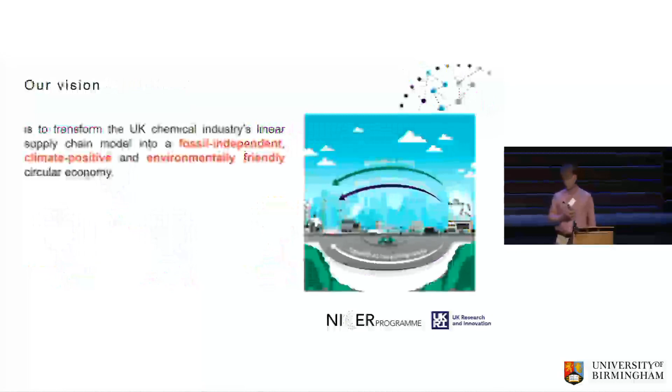So the vision of our centre is to then transform the chemical industry from its linear model towards a more circular model. The chemical industry is a very complex sector. There's thousands of different chemicals. So when we set up the centre, we decided to narrow it down to organic chemicals, so carbon-based chemicals, and specifically within that olefin-based chemicals, which account for about 70% of all organic chemical production.

The centre is led by Jin Xuan, who started in Loughborough but has recently moved to Surrey University. And we've got 7 other partner institutions: Loughborough, Cardiff, Liverpool, Hertford, Sheffield, Newcastle, and Imperial College. And we started with around 23 partners, but now we're working or engaging with over 100 different organizations.

So let's start to look at a bit of background about chemical resource flows. So generally we take our fossil material input. We can then refine this input into platform chemicals. Those platform chemicals are further converted into our desired chemical products. They are converted, then sent to the consumer, they're used. And at the end of the use, we might produce solid wastes, which if we're lucky, we can separate them, source segregate them, collect them, and recycle them.

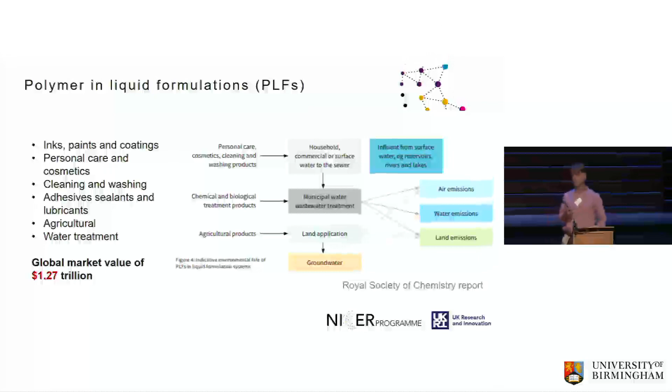But unlike the solids, it's quite difficult to collect these materials. So they might go into your drain, into your ecosystems, or they're directly released as CO2. So it is obvious that we need to find a different way of meeting those carbon shortfalls for those chemicals that we can't collect. So where are we going to get the carbon from to meet that gap?

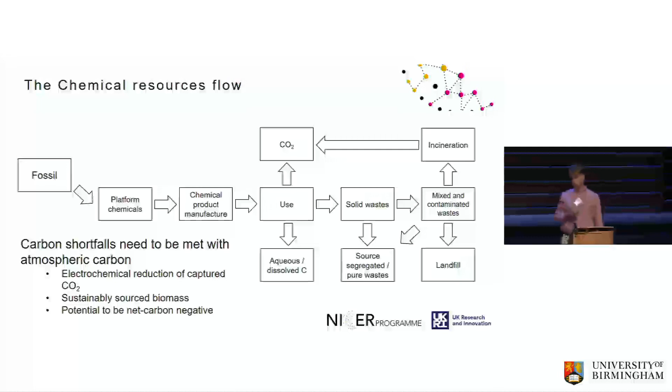Two of the solutions could be that we use the CO2 that's released in the environment, we electrochemically reduce it back into chemicals, or we could use biomass, which uses the CO2 for growth, and convert it into chemicals. And one of the big advantages of that is that it also gives us a potential to make the chemical industry carbon negative. So if we capture that CO2 and convert it into material, we store that carbon, and we move from a fossil-based system to a carbon negative system.

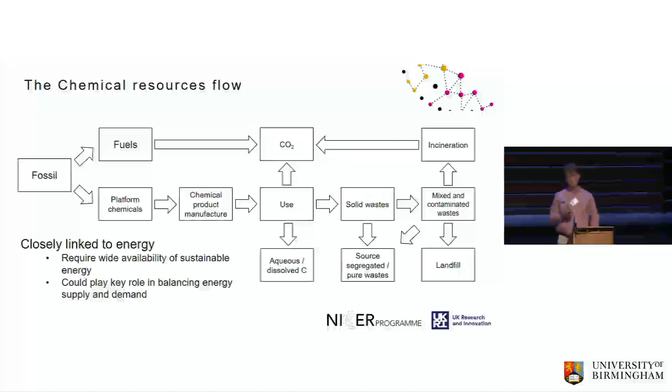And the final consideration is that the chemical industry is actually very closely linked to the energy system as well. So when we take the fossil fuels out of the ground, we don't distinguish whether this is a chemical feedstock or a fuel. In fact, we measure all this material in terms of energy units, and only when it comes out of a refinery, we start to say, okay, this is the quantity of chemicals that it's got. And a lot of the processes that we use in here are also very energy intensive. So we need to think about where we get the energy from.

So just to summarize then what we are trying to do, we've got our linear economy starting from oil and gas. We produce our petrochemicals, intermediates, we produce polymers, but also other chemicals into our finished products. And then it moves into the use phase, where at the end of that we produce waste, and this waste is currently collected, sorted, and then disposed. So we have already done quite a good job in the UK focusing on mechanical recycling. UK plastic recycling stands at around 45%. But as I explained, that is only a small fraction of all the chemicals that are used.

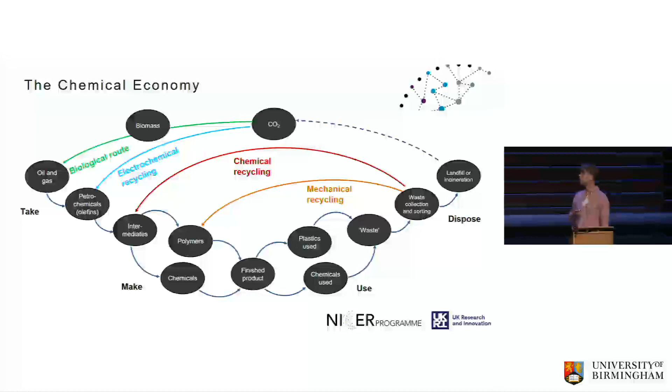So the next thing we can look at is use that material and then break it down into its chemical building blocks through chemical recycling. But even so, we will still have a lot of emissions in the form of CO2, and then we can start to look at electrochemical reduction, electrochemical recycling, using this excess renewable energy. Or finally, that CO2 is released, it is captured in the form of biomass, and then we can use this biomass and convert it back into fresh chemical feedstock. And this is really what our center was based on.

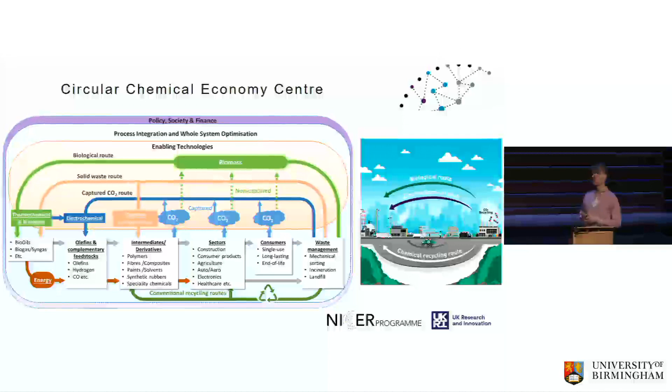So this is the same kind of diagram with a little bit more detail. And I'm going to now explain more about the center structure and what we're trying to achieve in the different work packages. So our center consists of three integrated themes. The first theme is focusing on underlying technologies that we need to achieve this transition. So how do we take the waste and convert it back into new feedstock? How do we use the CO2 that's released and reduce it into chemicals? Or how do we use biomass to meet our technology gap? So this is really focused on lab-based research to develop new technology options to supplement the technologies that already exist.

Theme 2 then looks at the application of these technologies. How can they be used as part of a wider system? So, for example, we might be wanting to produce a certain product, and then we can see how we produce it currently, what are the new ways of producing that, and then we can compare the economics, but also the environmental impact, and find the social impacts of different system routes.

The final theme is looking at anything that is non-technical, so all the kind of barriers and opportunities associated with the circular transition of the chemical industry. This ranges from the finance, how do we pay for this, or who should be paying for that? How do we work with society, and what do they want from a transition?

Engagement with industry, of course, is very important, the ones that are going to enable this. And finally, working with the policymakers to understand how do we create the favorable frameworks that encourage further innovation. And then all these different areas of the center are linked together through case studies and cross-theme integrations. And I will present some examples of them as part of theme 3.

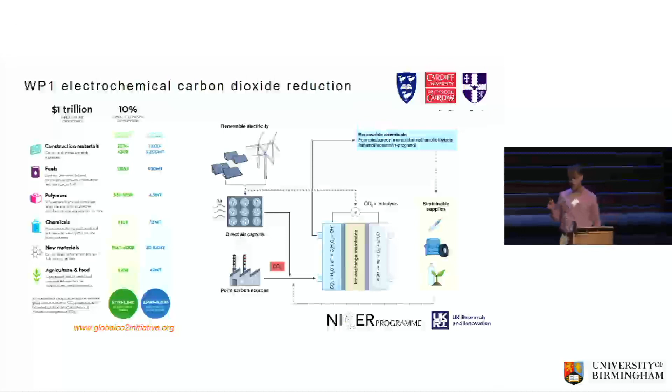To do that, we can either use direct air capture, where we remove CO2 from air, or we can use a point carbon source, and then we combine it with renewable electricity in an electrochemical cell to reduce the CO2 at the cathode and produce oxygen at the anode.

In the center, we took 2 different approaches. The first one is we can reduce the carbon dioxide into carbon monoxide and hydrogen for use as syngas. And there are already many different chemical routes available to then convert this syngas into different chemicals. And the nice thing about this approach is it's relatively straightforward. We can see we only transfer 2 electrons on the reduction side and 4 on the oxidation side.

So it's a reasonably well-developed technology. But of course, what we would really want to do is produce olefins directly, where we reduce CO2 into higher hydrocarbons like ethylene, propylene, etc. But then we can see that the chemistry here is a lot more complicated, so we need to transfer a minimum of 12 electrons. So we need much more advanced catalysts which enable us to do that.

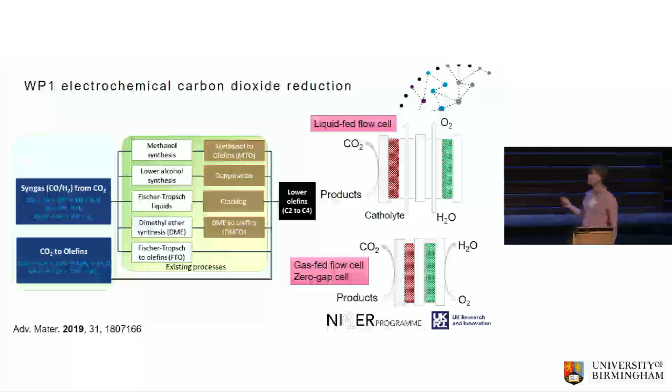The other difficulty with reducing CO2 is that we now need to develop a three-phase system. So we've got our solid electrodes, our liquid electrolyte in the center, and our gaseous carbon dioxide feed. So we need to overcome those mass transfer limitations. How do we transport the CO2 to the electrode surface? Conventionally, you would take your flow cell, with your electrolyte in the middle, and you bubble the CO2 through the electrolyte to come to the electrodes.

But our team in Loughborough developed a new system where the CO2 is brought into the cell from the outside. We've got a permeable membrane, so it basically comes from the back to the electrode surface where it can then be reduced.

So I'm not going to go into the detail, but really, how do we develop this technology? We need to think about developing new catalysts. For example, when we want to convert CO2 to syngas, we want to have high selectivity to carbon monoxide. We've got different electrode materials like copper oxide and tin oxide, and we can see that they provide us with differences in our product distributions. But now we can try and bring them together to tune our product selectivities.

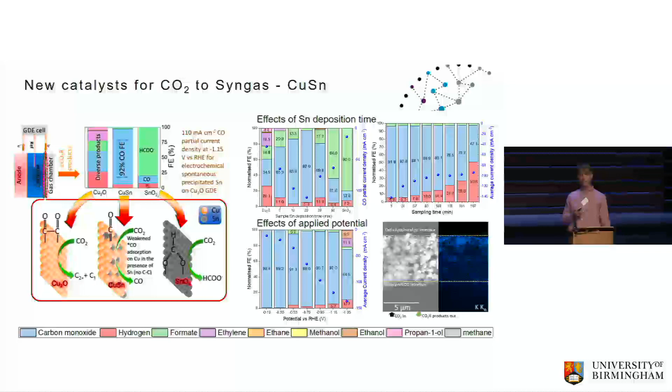Part of that is to do with flooding of a cell, where the gas is meant to come in from the outside, but actually the liquid is now penetrating through the electrode. And this is one of the challenges that we are working on for the remainder of the center.

A similar approach is taken for the reduction of CO2 directly into higher hydrocarbon products. So in this case, again, we've got two different electrode materials. So metals like silver, gold, or zinc are good at catalyzing that initial CO2 reduction step, whereas copper is very active for then catalyzing a dimerization step into higher hydrocarbons.

So again, we can try to combine those two materials together by loading different amounts of silver onto the copper surface, and then understanding how this affects our product selectivity. And again, we can see that after a certain time, now more than 50% of those products are in the higher hydrocarbon range.

The second work package is focused on the conversion of either waste chemicals or waste biomass, or sometimes mixtures of those two materials. So you might have your plastic container and it's contaminated with food waste, or mixed municipal waste. And there's many different options available for us for converting biomass.

So we can have a simple mechanical process where we're just drying it or pressing it, things like producing vegetable oil. We can use biological processes like fermentation, algae-based technologies. We can use chemical technologies, or we can use thermochemical processes where we're using high temperatures and sometimes high pressures to break down our material

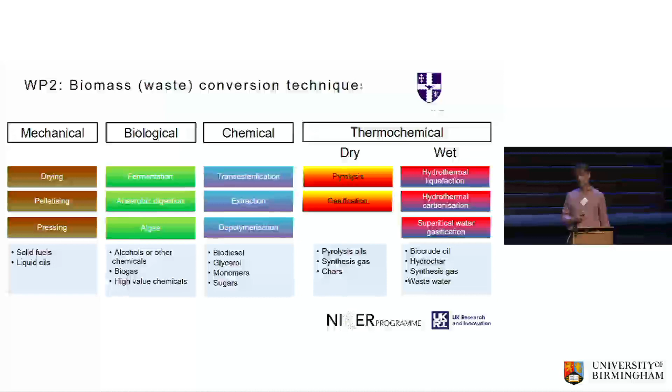In our group, we're looking at a hydrothermal process. You can use dry biomass, that would be pyrolysis, but we are specifically focusing on wet biomass, where we don't want to dry the biomass before use, and instead we actually conduct a reaction in water. So effectively, we've got our biomass, our chemical feed.

We add water, and then we put it in the reactor, which acts as a pressure cooker, so we keep the reaction in liquid phase, and we can go up to temperatures of around 370 degrees if we increase the pressure high enough. And the big advantage is we don't need to evaporate water. It's much more energy efficient, and water actually helps us to break down those chemical compounds more effectively.

And then out of the reactor we get a range of different products. The one that we're particularly interested in is the bio-oil phase, and converting that back into more chemicals. But we also produce an aqueous phase, a kind of solid product, and some gas. And one of the challenges is, how do we not just use one of these product phases, but what do we do with this aqueous phase? If we can't use that, we can't simply discharge it, and that would inhibit the use of this process.

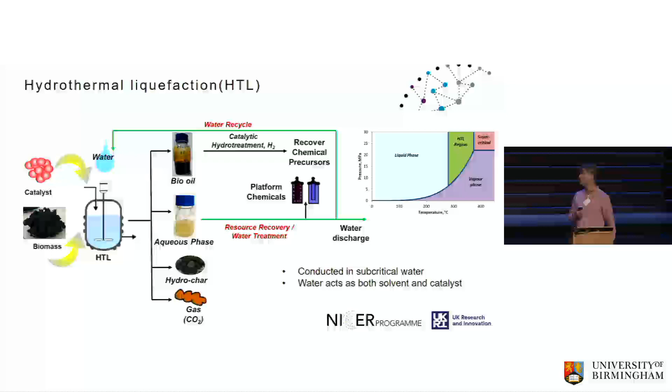So the first project that we looked at was the conversion of a distillery residue, called draff. So it's quite a nice, well-defined material. It's got a carbon content of around 50%, but like most biomass, it's also got a very high oxygen content, and because of that, its energy density is quite low.

So here the energy density is around 22 megajoules per kilogram, compared to diesel or petrol, which is in the range of 35 to 40. So what we want to do is concentrate as much of the carbon into the oil phase, but remove some of its undesired other elements like oxygen and nitrogen.

So the first thing, we can put it into our reaction at a loading of around 10%. We can look at the impact of temperature, and we can see, well, we get oil yields of around 30-40%, but we do see much higher carbon recovery of up to 50-60%, which means that we can see this concentration of carbon into our oil phase. But of course, we only recover 55% of the carbon, so only 55% of the energy is now recovered into the oil phase.

So what we wanted to do then is try and see, can we develop catalysts which allow us to increase the carbon retention into the oil phase and make the process more efficient. But one of the problems with the use of catalysts in the system is that we produce all these different product phases, particularly the solid product, and if we use an expensive catalyst and it's mixed with our char phase afterwards, how do we separate this material?

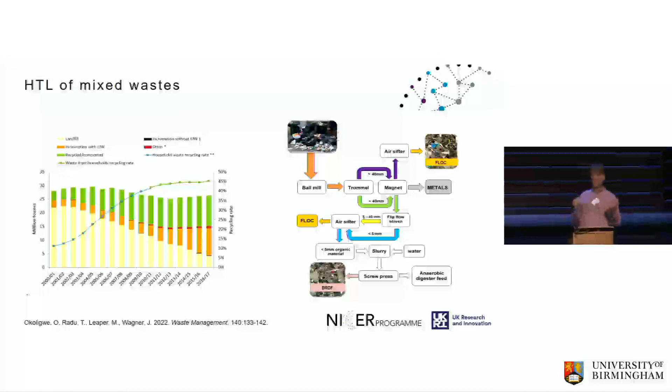Now, the last project used a pretty nice and clean biomass feedstock, which is really what we want to work with. But actually, a lot of the chemical wastes are mixed with other materials. So here we had a project where we took waste residues from a local waste management company, and in our area in Loughborough, waste is not very well separated, so we throw the food waste and organic waste all together in the same black bin.

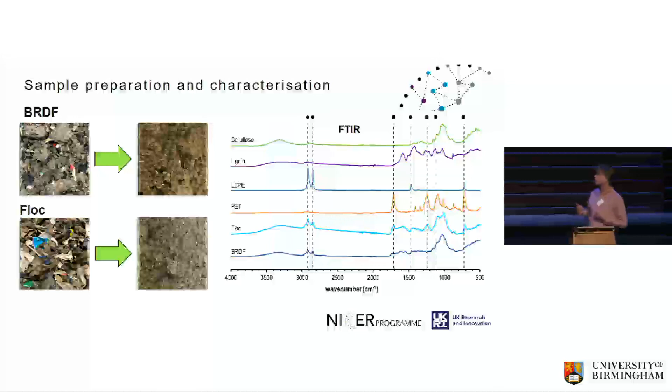One of the big problems with using waste materials is that they're very heterogeneous, but they've already gone through a lot of processing, so it's no longer possible to separate them into their individual components. So if I want to do a study in Loughborough and compare that to another study in another place using a different waste process, or even just take samples of waste in summer and winter, the composition is very different, so it's very difficult to compare these materials.

So one of the key challenges was how do we characterize this waste in a way that we can compare different waste materials to each other. So we could use chemical spectroscopy. Here we used IR analysis to look at the 2 waste samples, and we can compare them with known model compounds. That told us, yes, we've got some PET, we've got some polyolefins in there, but we've also got cellulose, probably from paper waste, and maybe some lignin from other biomass wastes.

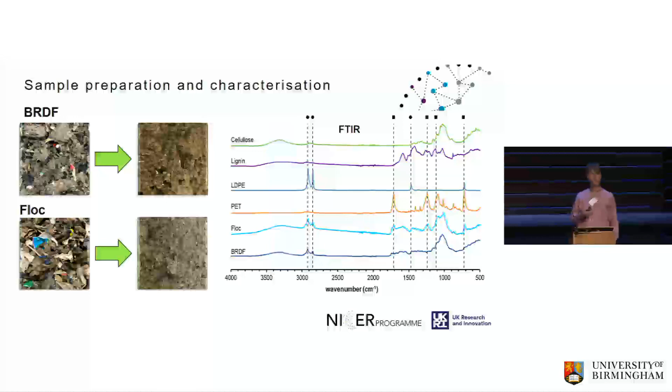And this is useful. It tells us what we already know, but it doesn't tell us the relative quantities of these different materials. So we spent quite a lot of time using different techniques to further characterize the materials. Here we used thermogravimetric analysis, where we look at the thermal decomposition profile of a waste. We looked at the hydrolysis of the materials to look at the cellulose and the sugar content.

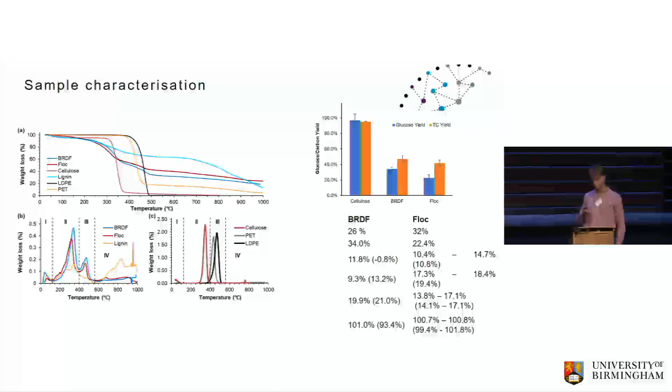And based on that, we then were able to create a picture of what are the key components of these waste materials. These might not be the most accurate values, so we can see there's some uncertainty depending on the assumptions that we make. But we believe that at least this gives us a like-for-like comparison to other studies doing similar experiments. We then exposed these residues to hydrothermal liquefaction.

And unfortunately, we can see that the oil yields were probably not as high as we would have liked. So we get oil yields of 30% for our wet material, but only around 10-15% for our solid plastic-containing material. And then if we look at the composition of the solids, what we saw is actually most of these polyolefins do not decompose at those temperatures. So initially, this is quite a disappointing kind of analysis.

But if we flip this around, it also gives us the opportunity to now use HTL as a separation method. So we can break down the organic, the bio-based content. We can convert it into bio-oil. We can use that even as a biofuel if we like, or we can use it as a chemical feedstock. But then we can use this concentrated plastics in a solid product, which is now a dry material, and feed this into other chemical recycling processes.

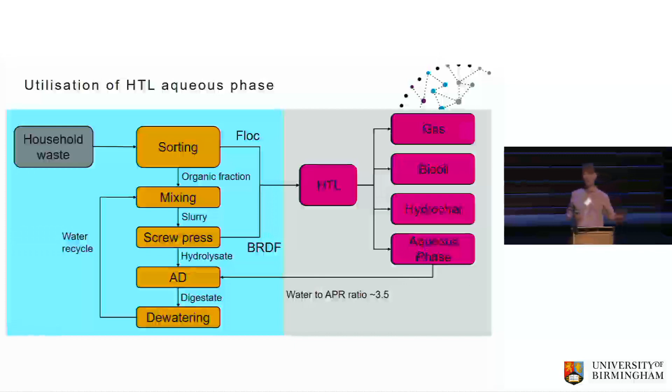So if we then look at the entire process, we can see this is the existing process on the left-hand side, where we are producing our waste residues, and we produce the feed into the anaerobic digester. And then we have our new process where we separate this. And here, based on the water that we use in the process, we can see that we use about 3.5 times as much water on the left-hand side as on the right-hand side.

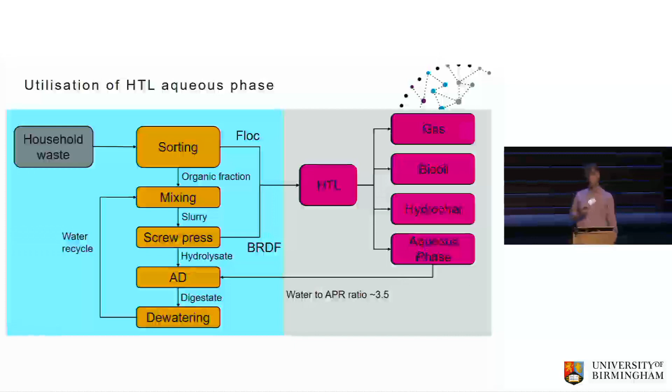So we wanted to then see, can we recycle this water back into the existing waste treatment process. So the first thing we need to check is, is this aqueous phase actually suitable for our biological anaerobic digestion treatment process? So we did some batch experiments. This is just a baseline, and then we used the 3:1 mass ratio of our sewage sludge to our new aqueous phase, and we can see that the process still works. The yields are a bit lower, but given that we've got 25% of our waste material in here, actually our overall energy recovery is higher.

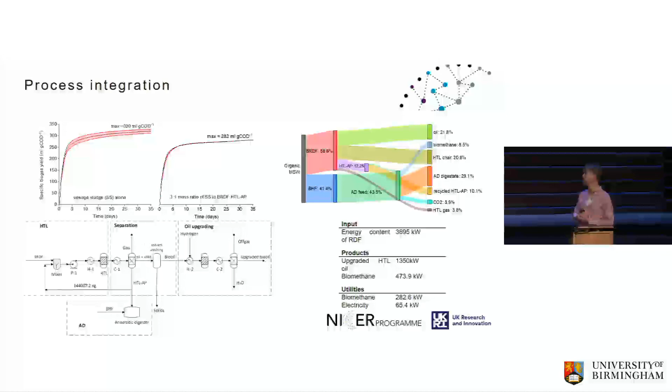And then we can produce an overall mass balance of the process, and we then model the system using process simulation software to see how much of the energy which was originally contained in our waste residue would end up in the bio-oil and in our biomethane product. And we can compare that to the energy use of the process, so we can see that we're producing a lot more energy product than the actual energy we need to put in.

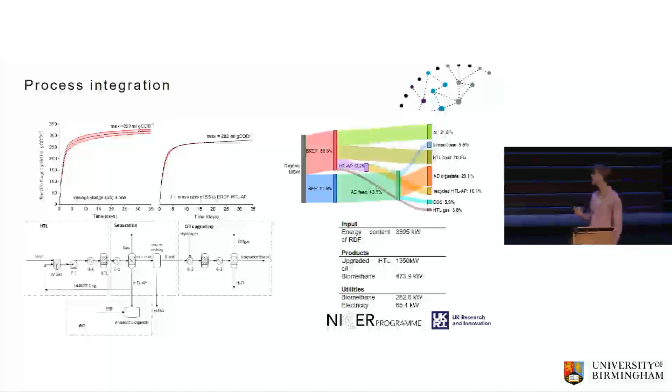So of course, these products currently do not include the solid products, which contain most of the chemical waste, the plastic materials. So if we can then send these to a chemical recycling process, we have the potential to really improve that energy balance a lot more.

Okay, so the final area in our technology development is focused on selective plastic depolymerization. So in the previous work packages, we worked with biomass or mixed contaminated plastic. But here we want to work with cleaner plastic waste to produce selective chemical feedstock to feed the polymer or other chemical industries.

And even though we do have mechanical recycling processes for some of these plastics, actually in terms of polypropylene, only 1% of polypropylene in the world is currently recycled. This is partially down to inadequate selection and contamination, but also the fact that you can only recycle polypropylene several times before you reduce the material properties. So if we can break it down selectively, then hopefully we can use those chemical feedstocks to make more useful products.

So again, we need to develop a catalyst, and the catalyst then allows us to adsorb our polypropylene onto the surface, transfer hydrogen and cleave those bonds, and then release our desired intermediates. Unfortunately, we can't just produce very precise precursors, but we produce a range of products. We don't want the short products, which are in the gas phase, and we don't want the very long products, which are kind of waxes, but we really want to target the liquid and lubricant range of chemical products.

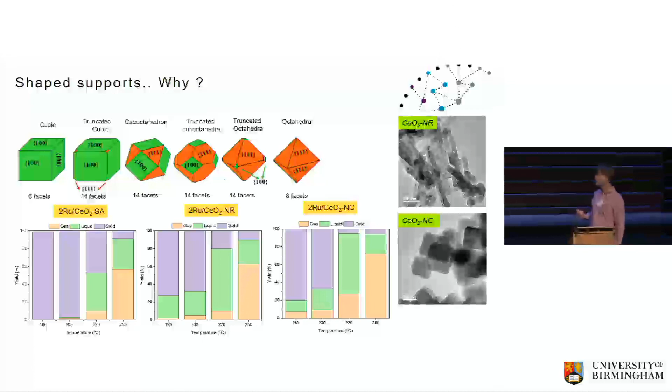So at low temperatures, of course, the activity of a catalyst is quite low, so most of our products are solid. But then if the temperature is very high, we produce mostly a gaseous product. So somewhere in the middle, around 220 degrees, we get a very high selectivity to our desired liquid products. And we can see indeed that the type of the support, whether it's got a nanorod or a nanocube, really influences the kind of product distribution that we can get.

So experimental work, of course, is very important, but it can also be very expensive. So the experimental work is done at Liverpool, but it is supported by our team at Cardiff, who are doing molecular simulation to understand really what is happening on these catalysts.

So here we have to simplify our reaction first. We start with our polypropylene molecule, but then this is modeled in terms of pentane. And we can see that we've got 5 carbons, so we've got carbon in different positions. So we want to understand which of these carbons is the most likely to actually participate in a reaction, and how the support helps to catalyze this.

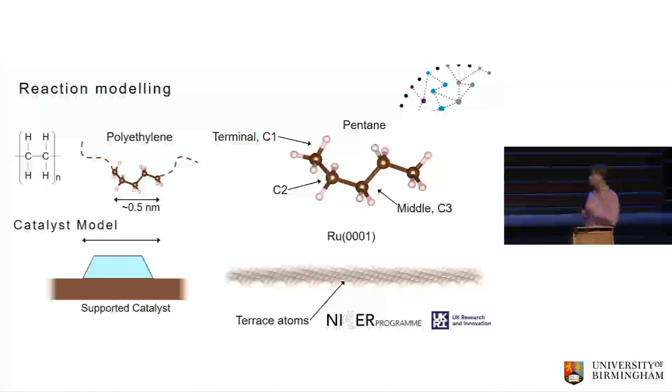So what we then do is we simulate the adsorption of the model compound onto the support. We look at the bond distances, and based on that we can then calculate the energy to form and break these bonds and create energy diagrams. And what we can see here is that going up means we need more energy. We have to climb this hill.

So this work is then telling us that the most likely carbon to remove is the first one in the chain, so it really means we are unraveling those molecules from the end. And using that, we can then improve our catalyst design. Okay, so this was theme 1, the technology development side. All this work is quite low TRL, and we were trying to develop new technologies.

But what we really want to understand then is how do these technologies help us to transform our chemical sector? And this is where we're looking at the whole system approach. So to do that, we first look at process integration. We build our process flow sheets. We then combine these with life cycle analysis.

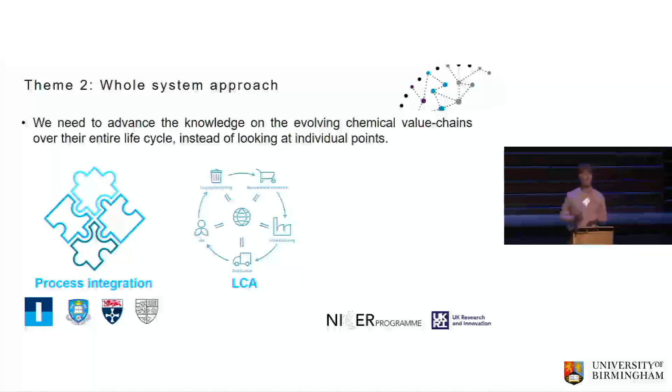And then finally, one area which is becoming increasingly important is not just to look at the environmental aspect, but also the social aspects of this change. So if we create a process which is only affordable to certain areas of society, that is not really going to form a sustainable circular business model.

I've already shown these diagrams, so just to reiterate, this theme really sits in between the enabling technologies, so we can use the knowledge from the technology development, and finance, society, and policy, and it's very important to take and communicate with these two different areas.

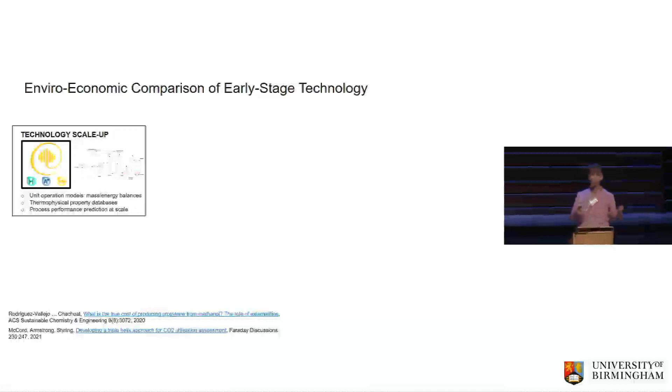So Andrea, in his presentation, will talk more about a case study which is based on sustainable ethylene production in the Teesside cluster. But here is a very rough overview of how we might go about that. So we might identify the product we want to produce, or we've got a waste and we want to work out the best route for what we want to produce. So there might be competing uses for a certain material.

So we can create a process flow sheet or a range of alternative process flow sheets, and we model them, we optimize them, and that then gives us the basic information about the techno-economics. So how much does it cost? How much energy do we need? And this, of course, is very important.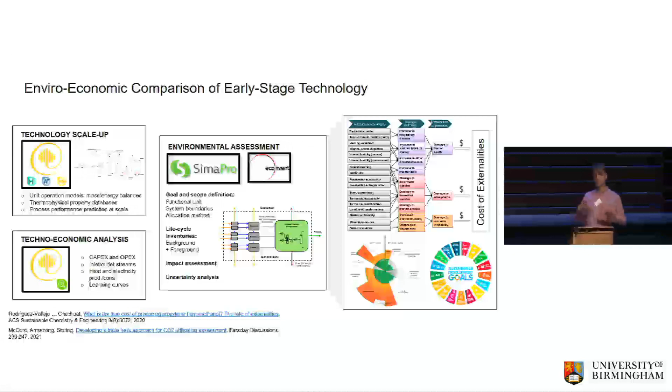But then we can use the data from these models and feed them into life cycle analysis software, like SimaPro, using the ecoinvent database to then estimate the different life cycle impacts from these processes. One of the difficulties with life cycle analysis is that we've got many different impact areas, and that can become very complicated. So we might want to try and group them into better impact categories, and then into the final impact on human health, on the environment, and on resource availability.

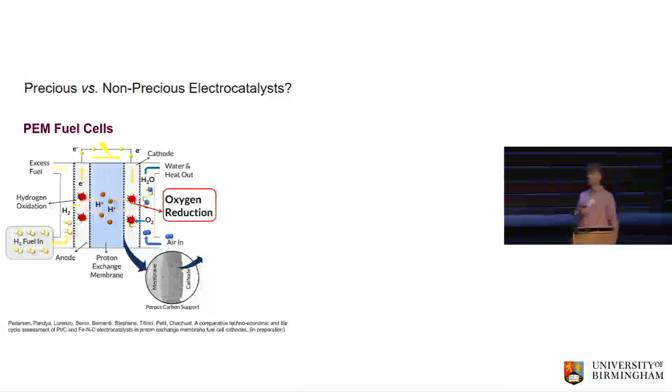And a popular approach is to then also combine that with a global boundary system. So we say, well, we've got only one world, so if we use different categories, how much of this world would we need for this process? So one example would be the use of PEM fuel cells. We want to use hydrogen as a clean energy carrier, but we need a catalyst to help us to combust hydrogen. The state-of-the-art material is platinum, which works extremely well. It's very efficient, but platinum is also a very expensive and rare material. So there's a lot of research going on in alternative materials.

So for example, we've got here an iron-nitrogen-carbon catalyst with a lower TRL level, but how do we now compare those two materials? First of all, we can look at some of the performance data. We see platinum has a much higher power density. We need much lower catalyst loadings as a result, and because of that, of course, we also need much less catalyst. But the iron-based material is a lot cheaper. So from an economic standpoint, maybe this is acceptable.

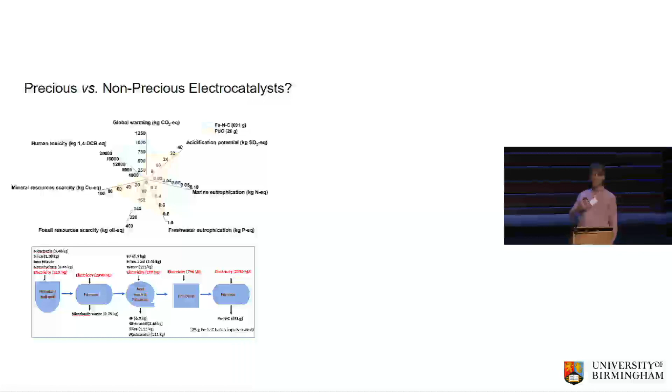But when we put this through life cycle analysis and through our global boundary model, we can look at different impact categories, and we can see that the two materials behave differently in different categories. As we would expect, platinum has a very high impact in terms of mineral resource scarcity. We need a huge amount of platinum, which we can't provide. There's a high degree of acidification potential and freshwater eutrophication. But this new, potentially cheaper material has much higher impact in terms of human toxicity, global warming, and marine eutrophication.

So to understand why this is the case, we then need to go back to our process model. Here is the process which is used for the production of this iron-based catalyst. The first thing that stands out is that it's extremely energy intensive. Each of these steps requires large amounts of energy input, and our current life cycle analysis assumes that this energy is consistent with our current grid supply. And because our grid is heavily carbon-based, this then has a very high global warming potential. Even though iron and nitrogen are quite harmless chemicals, we also use things like hydrofluoric acid in the production, which can explain some of the other high human toxicity risks.

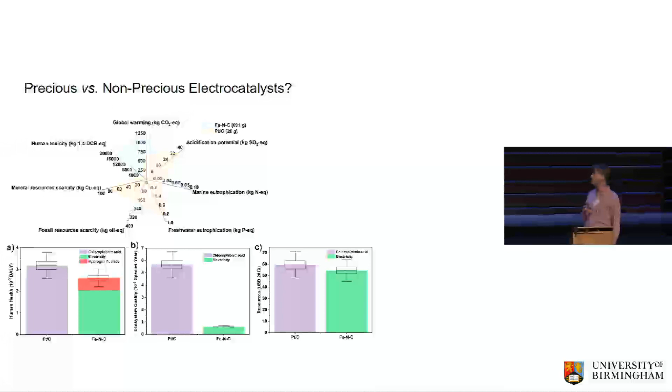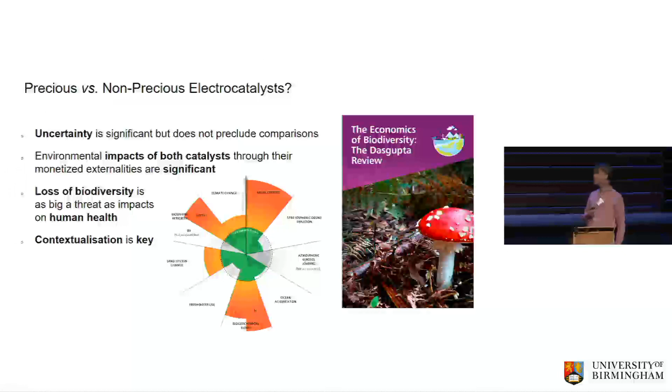So one issue with all this analysis is the high uncertainty. We rely on databases, we rely on certain system boundaries, and this makes some of these areas quite uncertain. And you can see there's even some areas which are very, very poorly understood, even though they do have an impact. But what we can still do is use them as a comparative tool, and then help them to drive our decision making. As I said, Andrea will present about the Teesside cluster in more detail, so he's probably better placed to answer any questions about this area.

But the final theme of our center is looking at policy, society, and finance. All the technologies are, of course, really important. We need to understand how we can solve these problems. But we also need to understand the systems and the non-technical challenges around that. If we ignore them, we will never have a reasonable change. And these include: why would business actually want to become more circular, and how can we encourage them to build more circular business models? How can we pay for this transition?

What is the public engagement with the chemical circular economy? This morning we heard a lot about public engagement with the textile industry, but the chemical sector is a lot more removed from consumers. The textiles we interact with directly, whereas a lot of the chemical stuff is happening behind the scenes. And then, of course, what do we need to change? What policy do we need?

So in terms of circular business models, we conducted a range of case studies where we really want to understand how does becoming circular affect your business model? What are your drivers, or what are the challenges to increasing the circularity of a business? And how does it depend on different actors? So it's a very complex, interwoven scheme. So how do we work together across different industries to facilitate this transition?

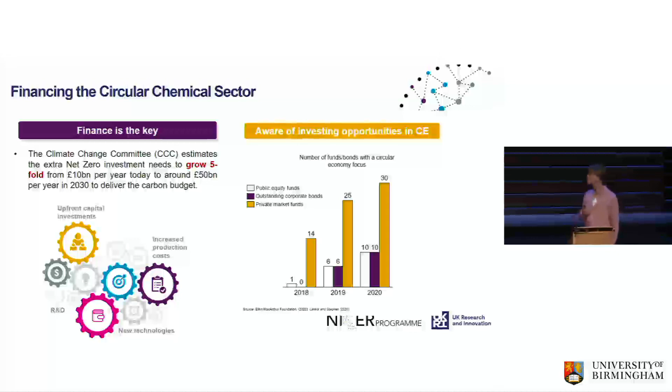Another area we look at is on the finance side, and of course we have some investment in circular economy, but this needs to grow quite substantially if we are able to deliver on our carbon budget. And we can see we've had some growth already over the last few years, but at the moment this represents a very small fraction of overall investment. So it is trying to look at what are the existing business models, what are the new circular business models, who are the different funding agencies, what motivates them, and then what are the tools to use the funding.

And here again, we worked with a couple of companies to try and understand how they came from technology development towards full-scale production. So here, Celtic Renewables was actually launched in 2010-2011, but then it took them over 7 years to get the industrial backing to create a commercial process. And within this time, they actually successfully acquired government funding, but then they lost it because they couldn't get the in-kind matching support. So that actually made the situation worse. It's quite difficult. How do we get through this valley of death?

Okay, so the last area that I want to quickly touch on is the social dynamics. So to try and understand consumer engagement with the circular chemical industry, we conducted a large survey of 2,600 participants, and we tried to understand what they understand about the circular chemical industry, and whether they are willing to actually take more circular decisions. And based on the responses, we can group our respondents into different categories.

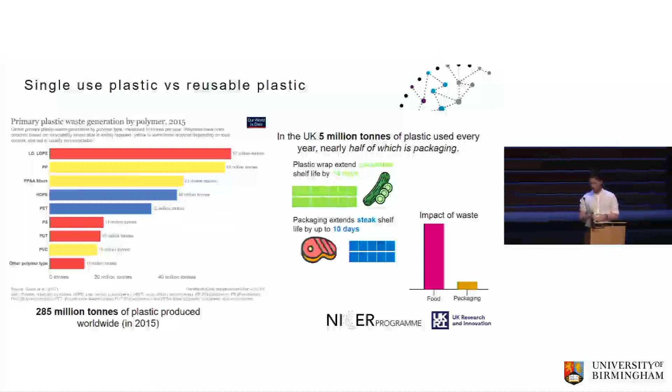So we all know that we are producing a lot of waste, a lot of plastic and a lot of plastic waste, and the big plastics like polyethylene, in particular low-density polyethylene, for example, is also not very widely recycled. And in the UK, for example, we use 5 million tons of plastics every year, and nearly half of this 5 million is for packaging. But packaging has also a very important role, which is to extend the lifetime of food and hopefully reduce the food waste, which has much higher impact than plastic waste. So we still need to keep at least some of the packaging.

So one idea could be to have some sort of reusable packaging material, and we work with a company on this. It's a small startup company, and basically their idea is to have a food pouch that you can use and then return to the packaging provider that essentially washes it and resells it to the food producer. And the idea itself has potential, but we need to quantify correctly the impact of this kind of return or reuse scheme.

And in particular, even though we can use this pouch hundreds of times, whenever we introduce the fact that the return rate will not be 100%, even if we have a 90% return rate, which is quite high, on average we use a single pouch only 10 times. So this really puts the focus on the consumer behavior and also the adequate infrastructure to have a high enough return rate. Otherwise, essentially the average utilization will not be high enough.

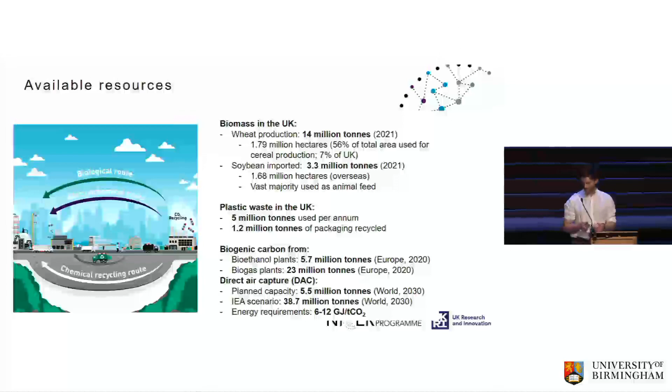Now, when we look at ethylene, we focused on Teesside because there is a big ethane cracker from SABIC that produces 800 kilotons per annum of ethylene. And there are different ways we can make this ethylene production more sustainable. One way is to keep business as usual, so still do ethane cracking, but we can either capture the CO2 or we can electrify the cracker itself. So instead of delivering the heat required with methane, we can deliver it with green electricity.

Or we can start from bioethanol and then use catalytic dehydration of ethanol. Or we can do some sort of chemical recycling, and in this case study, we consider pyrolysis of polyolefins. Finally, we can start from CO2, but as John mentioned, the TRL level is a bit lower here, and we essentially need a reliable source of CO2 and a renewable energy source. And wind is essentially the best option, especially in the UK.

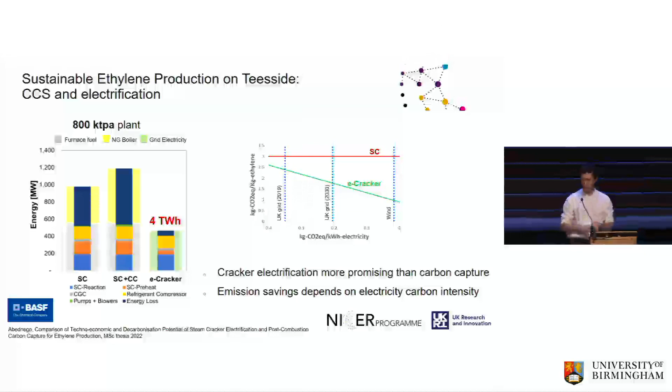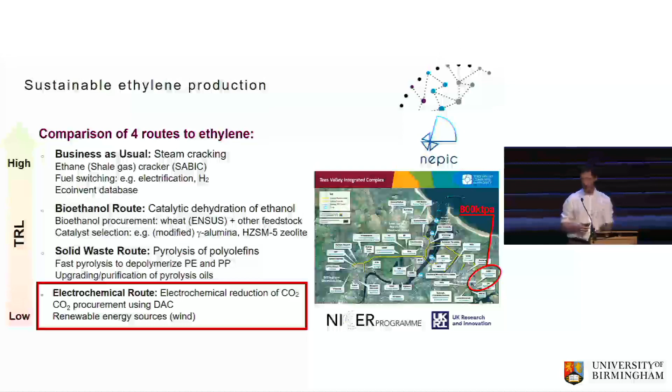Now, on the other end of the spectrum of TRL levels, we had a look at electrochemical routes. And here we compare different routes that are either purely electricity-driven or partially electricity-driven and partially thermocatalytic, keeping at most one intermediate. So we can go through methanol, through methane or through CO. And we did a similar study. We had a look at the costs.

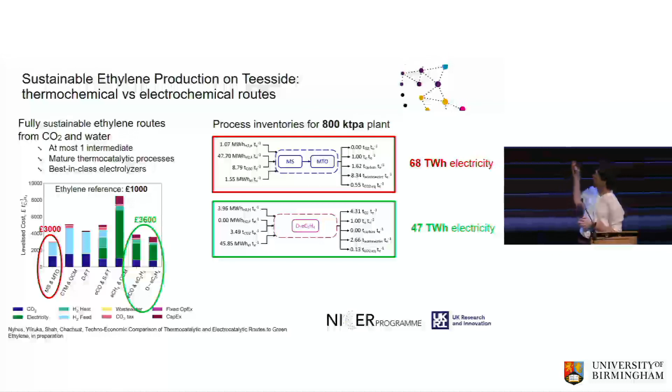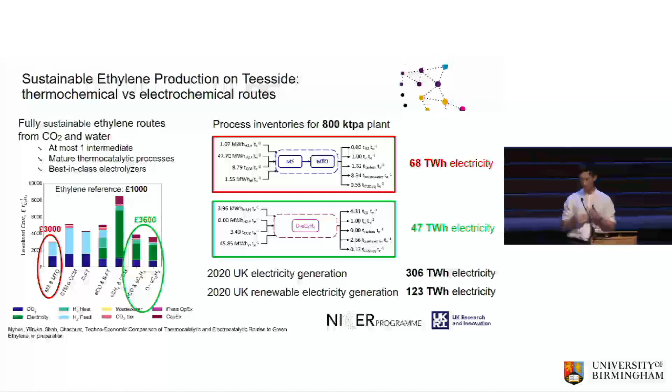So here we found that the cost will be significantly higher, roughly 3 times higher for the best case scenarios. And most importantly, when we scale up the process and look at the inventories and the amount of electricity that we need, here we are going to need much more electricity, one order of magnitude more. With the best case scenario here being the eC2H4, it's still going to require 47 terawatt-hours of electricity. Now, when we compare this with the electricity generation in the UK and the renewable electricity in particular, we see that it's probably not going to be feasible because the amount required is essentially too high.

So there is a take-home message here. One thing is decarbonization of the chemical industry, another is defossilization. And there's an energy penalty to pay there. And so we really need to figure out reliable and hopefully cheap sources of renewable electricity.

And a similar conclusion has been achieved in this recent report from the Royal Society, which was talking about net zero aviation, but essentially their conclusions are similar. So there's not a single winner, a clear winner, and probably we will need to rely on a portfolio of alternatives and also try to find ways to valorize the CO2 to enhance the competitivity.

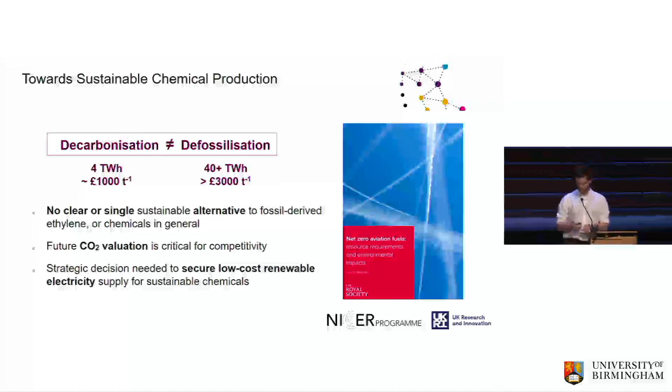Now this leaves us with the last 2 options, and here I'm going to just show the LCA results. So we can have a look here at a simplified block flow diagram of the 2 options. And a key point to make here is that both the ethanol production and the plastic pyrolysis have not only a main product, being ethanol and ethylene, respectively, but also a set of byproducts. And in case of ethanol, we have this DDGS, which can be used as a soybean meal substitute. While in the plastic pyrolysis, we have another set of hydrocarbons that also has a market value and can be

sold in the market. Now, in LCA, when you have multifunctionality, something that has been mentioned during the first day of the workshop, you need to take this into account, and there are different ways to do it. And what we usually try to do is use system expansion, where essentially you give to the process some environmental credits, because they are going to displace a product that would have had to be produced in other ways.

So a key assumption here is that there is a market for the product. So it has to be a product that you are actually selling to the market and not creating without any reason. And this is particularly important when you scale up the process and look at the big picture of how much you produce, how much is required from the market.

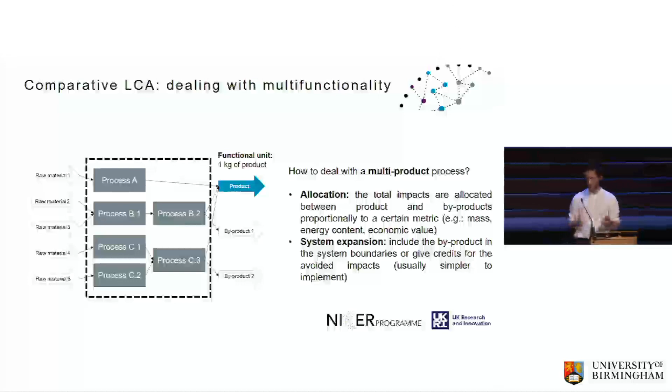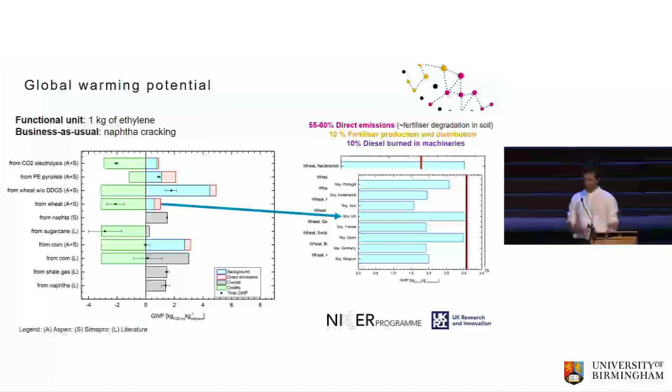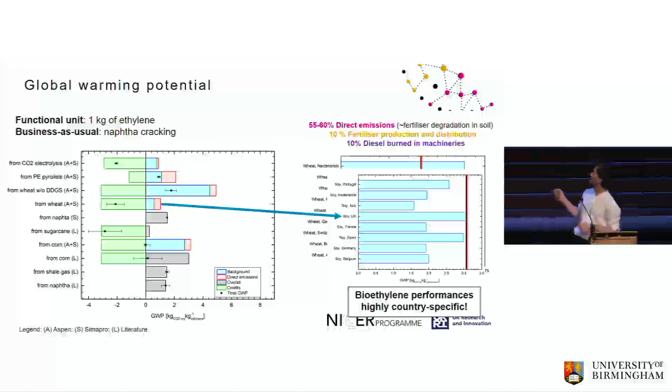And going back a little, we can also look at why the impact is high or low, and essentially the majority of the impacts come from fertilizers and fertilizer degradation in the soil. The conclusion here is that wheat-based bioethylene looks quite good because we are in the UK, but this performance is highly country-specific and depends on the particular circumstances.

Now, global warming is just one of the impacts that we can look at. There are several others, so-called midpoint indicators. We can't go through them all, so what we usually do is there are methods to aggregate them in these three areas of protection: damage to human health, damage to ecosystem, and damage to resource availability. And we can look at these three impacts for our four alternatives.

And for example, we see that now when we take the damage to human health, the bio-based alternative is actually performing much worse than business as usual. This is mostly because it emits a lot of particulate matter. If we go on another environmental category, which is damage to ecosystem, now wheat is going back to be a good alternative. And finally, when we look at resource availability, we see that essentially all the routes are using less resources compared to business as usual, which was somehow expected.

Now, we can further combine these three by applying some economic penalties to these indexes and come up with the so-called externalities cost. This, of course, adds an extra layer of modeling and an extra layer of uncertainty. That's why the uncertainty bars kind of explode here, but it gives us a way to compare the different alternatives overall, with the overall environmental performance.

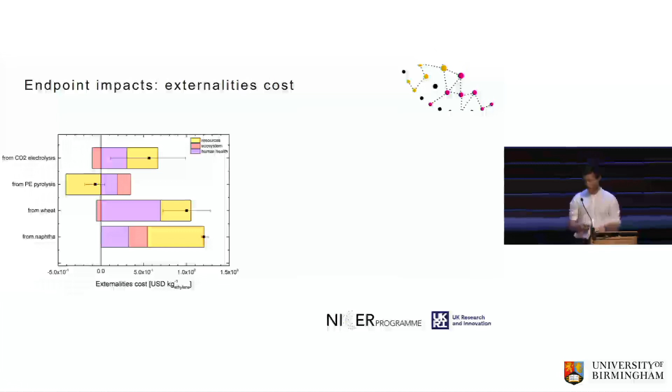And we can see here that combining all three together, the wheat-based alternative is very similar to the business as usual, but has a very high uncertainty around it, while plastic pyrolysis has a good potential, but we need essentially better models because we used a very simplified and very optimistic model here. So there is potential, but we need more detailed models to see how much of this potential can be actually delivered. And we can identify key areas of intervention.

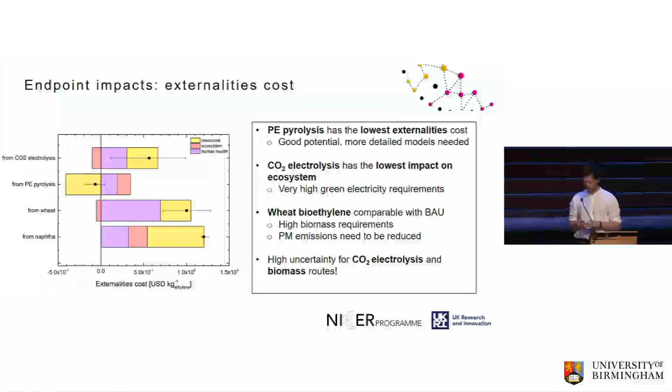are UK specific. Now, when we scale up the production for a SABIC size ethylene plant, we can see that we essentially need a third of the wheat in the UK, and we can displace half of the soybean imported, and this last bit could be a good thing. We would need an amount of plastic that is currently higher than the total currently recycled, and we will need also a very big amount of CO2. And if we scale up even further for the UK production, because the UK has 3 crackers, then we essentially exceed all available resources by quite an extent.

So the conclusion is, again, there's not going to be one single solution that is going to substitute all fossil-based ethylene. A key area is we need to reduce probably the total consumption through other mechanisms like reuse and repurpose, and then essentially combine all the possible routes that are available and economically feasible.

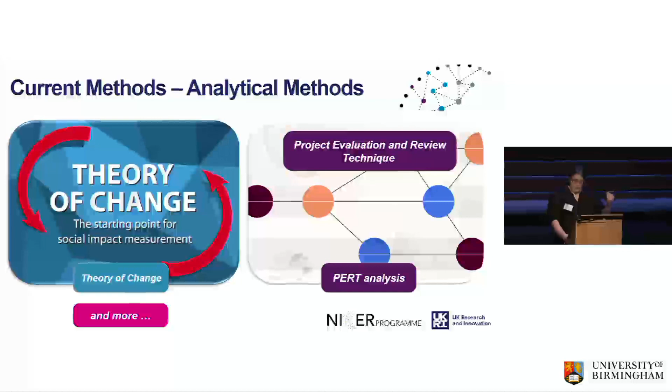And we also are using much more. This is just a selection, and we also want to devise our own policy tools in the future as well. And one thing I'd really like to mention is social responsibility, which I've already hinted at. We can't just focus on carbon emissions. We have to think of the bigger picture.

And I don't want to adopt, as sadly I come from a carbon dioxide chemistry background, and I think I sadly did have a carbon tunnel vision, but I think we should not go down this route of having one. What do I mean by this?

What if by, for example, you solving the CO2 issue, you've taken all the water, say, from another country, or you've dumped a load of toxic waste somewhere that's not on your doorstep, so on and so forth, or you may even create inequality. So we use this in our approach as well, so we always think of the social side when we look at policies, and we want to use that moving forward.

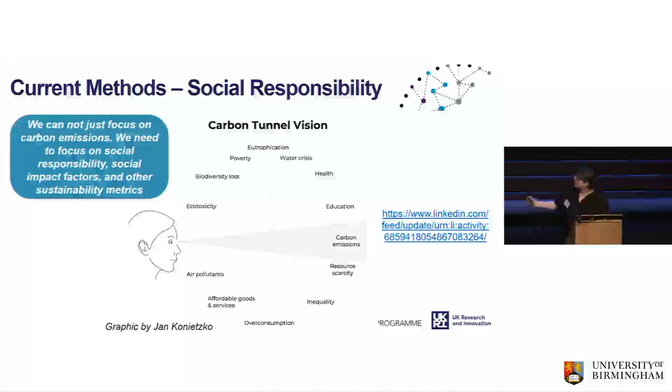So hopefully that's given you a good policy definition overview and a good overview of what I'm hoping to do and what methods I've been using. And now I'd like to dive into 4 particular areas of current outputs and work. So firstly, I'll briefly talk about a journal article I did, then reflect on the deep dive I did into COP26 and a little bit on COP27, discuss responses to online consultations, and then go into some big piece of work we're working on called carbon in the circular economy.

So when I first started out in this role, as I mentioned earlier, I looked into what is the current policy atmosphere. But we also decided to look back a little bit. So what was the picture before I started my role? And because COP26 was on the horizon and actually finished shortly after I started my role, how has that changed the policy landscape? So I'm only going to briefly discuss this today, but there is a link to it and it is published now on the Frontiers page, and I'm happy to disseminate this paper afterwards.

But essentially we looked at how policies before and after have changed as a result of COP26 and set out our own vision of how we think we need to get away from the linear model in our policies, be more circular, but also not only incorporate decarbonisation but defossilization. So I appreciate that's a very brief snapshot of it, but I'm happy to discuss it with anyone if you are interested.

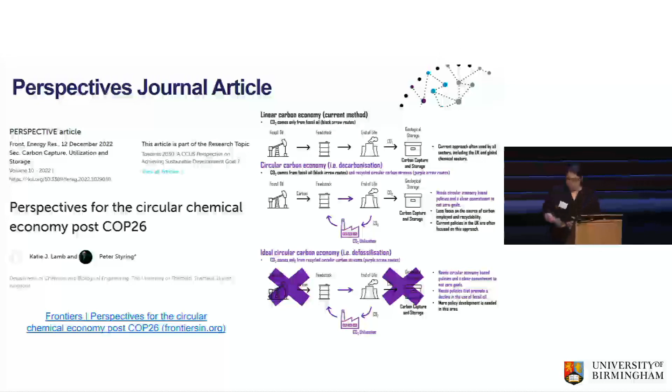Following on from that, I did a much, much deeper dive onto COP26 and 27 because, of course, we hosted COP26 up in Scotland, what feels like quite a long time ago, but not that long ago now, actually. And we thought whatever comes out of this will really drive future policies in the UK for a while. So I went away and looked at all the different policies raised and produced this report.

This is on the CircularChem website as well, but again, I'm happy to share these slides so you can go and read this. And essentially, when I did go to look at this, I was going with a chemicals angle. I was like, right, what's the future of chemicals? And sadly, chemicals wasn't really mentioned as the sector. It was sort of done on the mantra of cash, coal, cars and trees. So sadly, there wasn't much to say about the chemical bit, but we thought, well, okay, let's have a look at the mantra of COP26 and see what comes out of it.

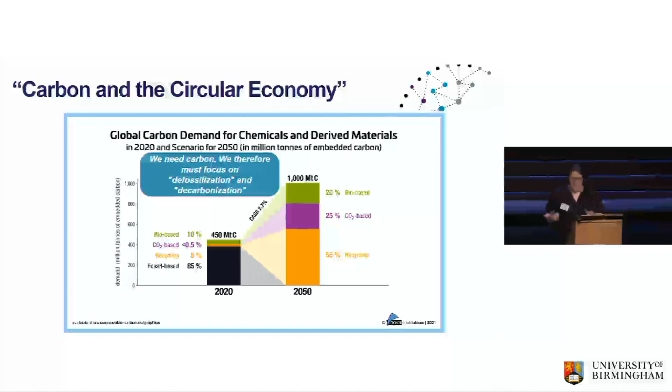Well, essentially, we're very interested in this as a centre, because carbon is very important for chemicals, and this is just to reinforce we do need it. We're sadly never going to not need it unless something drastically changes. So we must focus on both defossilisation and decarbonisation, and this ties in with what Andrea said. Of course, they both have their own issues, but we need to collectively use this and other techniques.

But it's complex. Again, this doesn't show the whole picture, but ICIS have this powerful image of how the petrochemical sector actually looks. And I mean, it's something that I can't even read when I have the figure open on my computer. It's really, really complex. How can you trace all that carbon? How on earth do we make this circular?

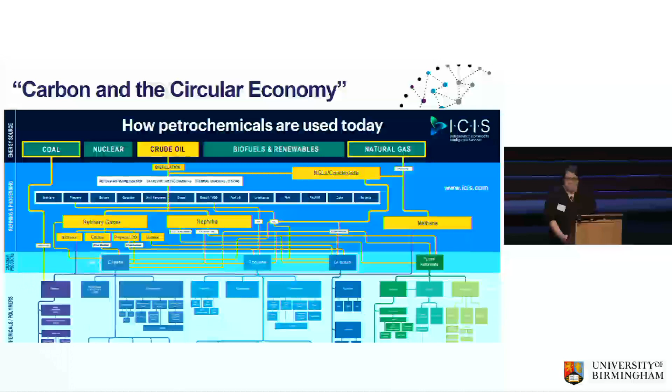And although it's ambitious, this is something CircularChem in the long run really wants to tap into, because although it looks scary, unless we do dive into the deep end and look at this, we might end up not really addressing the issue at all. So to try and learn more about this, an early stage thing we're doing is talking to you all and talking to different stakeholders in different sectors to try and gauge, well, is there a way around this, what's currently being done, or do we need to devise a new methodology?

So we've come up with a set of interview questions, and I must say Matthew's not here today as he's actually currently on holiday, a well-deserved holiday, but he works at the Newcastle team, and he's working a lot on road mapping, and because I saw that what I was doing on this with policy overlapped with his work, we thought we'd work together.

So that's all my current work and outputs, but I guess there's one thing I've learned in my short time in policy, because as I said I come from a chemistry PhD background and I've only been in policy for a few years. If there's one thing I can pass on before I do move on, it's do please engage. There are more options out there than you think. It might not be initially obvious, but you can get weekly or even daily gov.uk updates on policy changes.

Do go look at POSTnotes, look at what all parts of the UK governments are doing, so Scotland, Northern Ireland and Wales. And it depends if you want to see people in Parliament arguing all the time, but you can actually go and watch what they're debating and keep an eye on what's on the sphere. Because if you're researching something and they're debating about it in Parliament, that might be your opportunity to get in.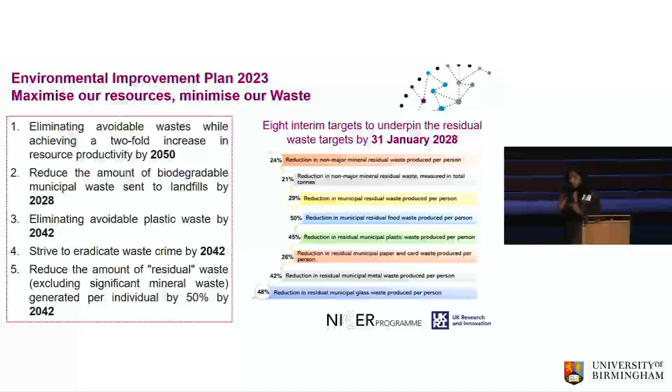So why am I focusing on construction waste? If you look into the residual waste that goes to landfill, the ratio of municipal to C&D is 80:20, so municipal waste is quite high. But I focus on construction waste particularly because of the environmental impact. Also, there are lots of new legislations for handling municipal residual waste, but construction waste is often not looked at well.

This is the waste data from 2018. Out of the 222 million tons of waste produced, 138 million tons are from the CD&E sector. Even though the C&D sector has a very good recycling rate of about 90%, about 5 million tons of waste from the C&D sector goes to landfill. So even though it's just 10%, the number is quite high, about 5 million tons.

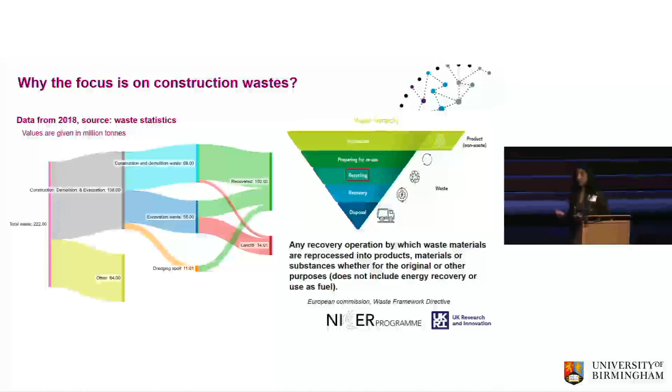If you look into the waste hierarchy, the first priority is to prevent the formation of waste, followed by preparing for reuse. However, if the material cannot be reused, the next option is to recycle. Recycling is any recovery operation by which waste materials are reprocessed into products, materials, or substances, whether for the original purpose or for a different purpose. However, energy recovery is not considered recycling. It comes under recovery.

There are lots of legislations on waste management. I'm just talking about one particular legislation, which is on the landfill tax. So the UK has had the landfill tax since 1996, and the price has been growing since then. Recently we pay about 102 pounds per ton for the waste that

goes to landfill. In the landfill tax, I think it's categorized into two rates. One is the standard rate, which is applicable for most of the waste. However, we have a low rate landfill tax, which is much lower. It's just about 3.25 pounds, but it's applicable for the materials which have very low environmental impact.

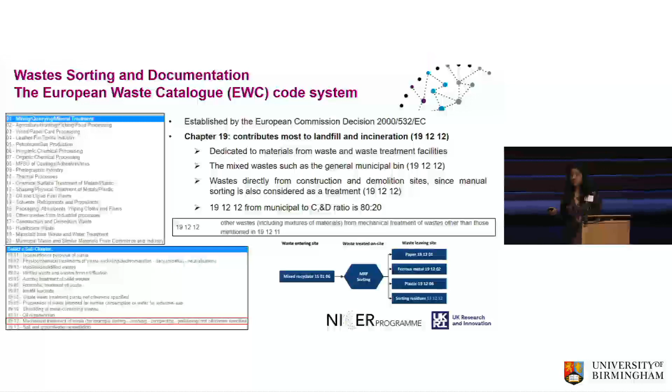They go into the MRF site and get sorted, and finally, whatever is not sorted or doesn't fall into other categories comes out as 19 12 12, and goes to landfill and incineration. And when I talk about mechanical treatment, manual sorting of material is also considered mechanical treatment. So lots of materials from construction sites come directly into the landfill site without being processed through any treatment facility, because manual sorting is considered as the treatment.

So now I'm moving to the actual project. I separate the methodology into two. The first one is to understand what wastes go to landfill. I was provided a data sheet by DEFRA, which contains the quantity of different residual wastes. This data sheet just contains the non-municipal, non-major mineral waste. And to understand the nature of the waste, I visited and interviewed a landfill site manager at one of the landfill sites at Newcastle.

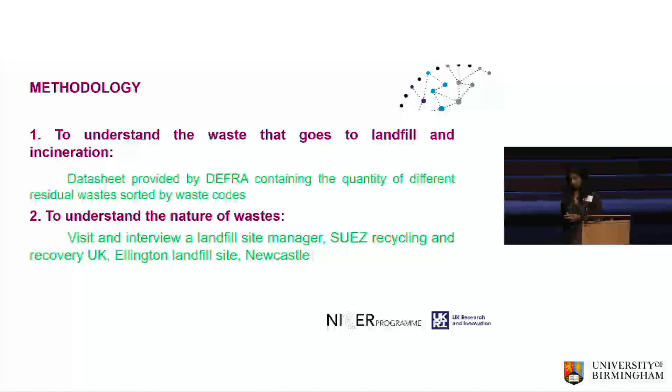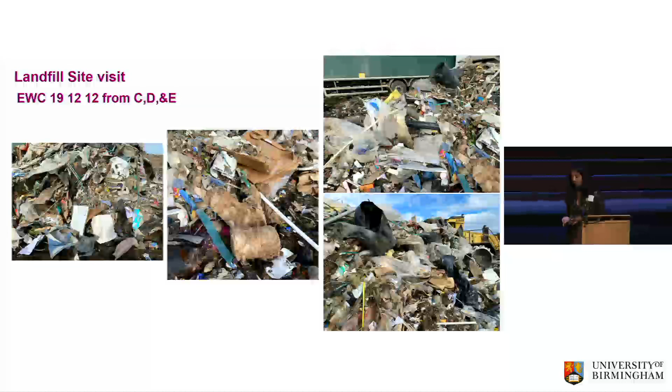So I visited the landfill site and got a few pictures of a truck that just came from a demolition site. If you look into the pictures, the waste is quite diverse; it's not uniform. It also had some soils and radiators. I'm not able to show the radiators in the picture. There were a few radiators, mattresses, carpets.

So the main thing that has to be done is the initial sorting of the material. That's what had to be done, and it was not done. When I asked the landfill site manager, he mentioned that paying a manual labor charge to sort these materials at the source is much higher than the price they would pay to landfill this waste. So these producers don't really sort the waste. They just dump it in the landfill site.

So it has to be sorted first. This is just one idea that I propose; it's not from any article. Initially we have to sort out all the big waste like polymers, mattresses or carpets, and big aggregates. After sorting them, we can pass this waste to trommel screening and collect the fines, which can go as a landfill cover. Then we can separate the metals. Finally, we can separate the bio waste like wood chips and sawdust, and then lots of foams and plastic waste, textiles, and cardboards.

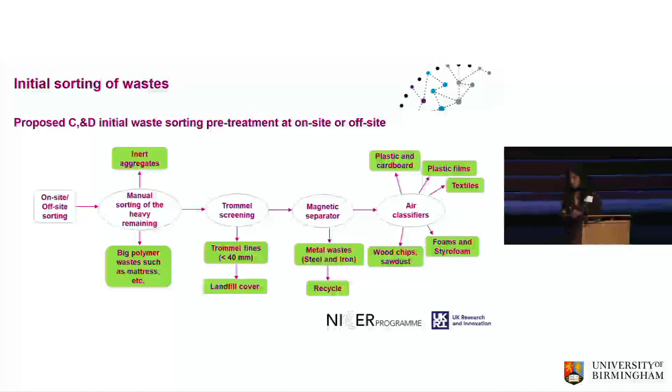So these are the 5 categories of waste that I observed at the landfill site. We can categorize them into inert, metals, pure biomass waste like wooden logs, cardboards and papers, and pure plastic waste. I have given some examples in the table. And there is some waste which is a biomass polymer mixture.

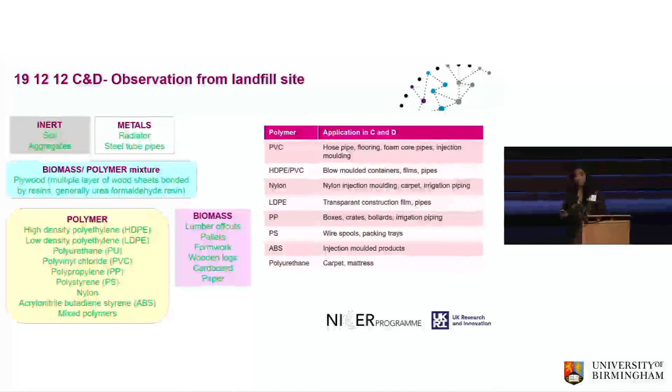There are lots of technologies, like John mentioned. I'm not going into detail on the technologies. There are lots of different technologies that can be used, but I'm just pointing out the important or promising technologies for treating this waste: anaerobic digestion, gasification, pyrolysis, and hydrothermal liquefaction. Because John showed a lot about these things, I'm just quickly moving on.

However, we have to consider that construction wastes are mostly contaminated; they are not fresh materials that can be recycled. For the polymers, the first priority is obviously mechanical recycling. But to some extent, mechanical recycling requires a pure polymer. So if they cannot be mechanically recycled, then we consider these chemical recycling technologies. Anaerobic digestion is suitable only for biomass, so any plastic contamination should be removed.

So biomass can be treated by anaerobic digestion. It's an excellent option, and it can be treated by gasification. However, we have to make sure that the biomass has less ash and less moisture. It can also be processed by pyrolysis and HTL. But for pyrolysis, again, we have to make sure it has less moisture. It's not good for moisture content more than 10%. And HTL is a very good option because it happens in the presence of water, so the moisture content is not a problem.

For the other polymers like PET, AD is not a good option. But among the other technologies, pyrolysis works really well for polyethylene, polypropylene, and polystyrene. HTL works well for all kinds of plastics and also plastic biomass mixtures.

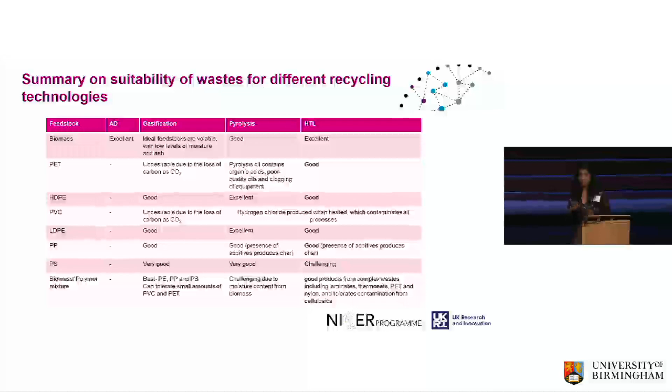But what's the current status of these technologies in the UK? As I mentioned, AD is a well-established process, and we have a lot of units in the UK, about 702 AD units until 2022. Usually they process food waste, crop residues, and slurries. However, like I mentioned, AD is very sensitive to polymer contamination, so it's suitable only for biomass waste.

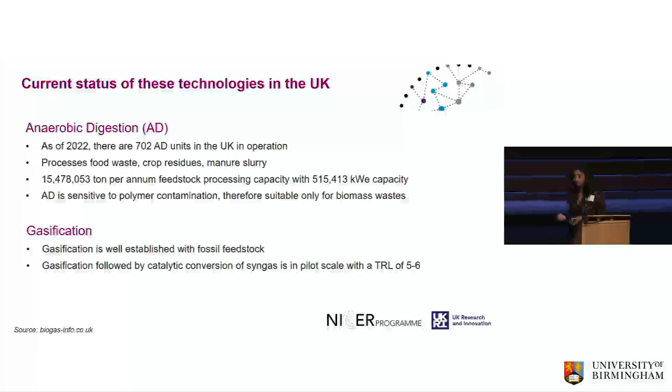Gasification is also a well-established process, particularly for fossil feedstocks. However, gasification has to be followed by catalytic conversion of the syngas, and this is still at TRL level 5 to 6 in the UK. In the case of pyrolysis, again, we have lots of pyrolysis units in the UK, but they are mostly small plants, not big plants.

Plastic Energy will have their first pyrolysis unit for treating mixed plastic waste, but they can process only polyethylene, polypropylene, and polystyrene; it's not suitable for other kinds of plastic waste. Hydrothermal liquefaction is mostly at lab scale. Mura will have their first plant in Teesside, which can process all kinds of plastic, including difficult-to-recycle materials.

And we need more strict regulations and guidelines for how to handle the organic waste from the C&D sector. And finally, we don't have enough large-scale projects to conduct the economic feasibility analysis. So we need more research in this particular field.

CE-Hub has coordinated the NICER programme, making great strides in achieving our goals of moving the UK to a circular economy. This midpoint is an excellent opportunity for us to take stock of our progress and to underline the importance of our collaborative efforts to embed circularity. We've initiated multiple mechanisms to support cross-programme interdisciplinarity and build capacity and capability amongst researchers, partners and the wider circular economy community. Collectively, we are conducting groundbreaking research to tackle technical, scientific, industry, behavioural and policy challenges in moving from linear to circular systems at scale.

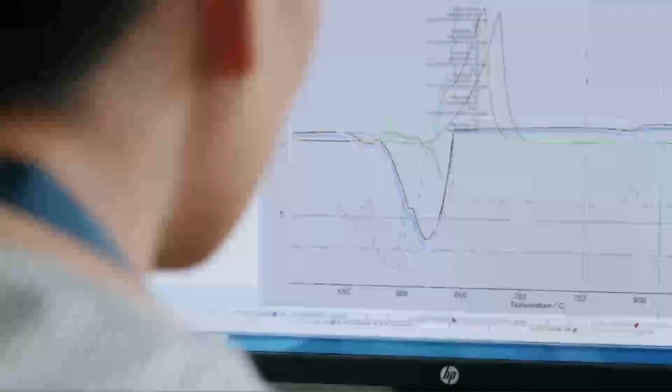Exciting breakthroughs include circular metals electric pulse treatment, extending the service life of a steel component by 75%. Met4Tech, construction minerals, and the CE Hub bringing together approaches for material flow and whole system value chain analysis. Circular Chemicals work establishing life cycle assessment methods for the UK chemical economy, and Textile Circularity Centre's environmental analysis of textile bio-waste processes. The NICER programme has also accelerated understanding of circularity across resource flows and sectors, building collaborative case studies, developing circular business models, and analysis of UK public data assets and policy levers, and cross-programme knowledge transfer events.

But we don't intend to stop here. For the remainder of the programme, we are even more focused on cross-centre collaborations to cement NICER's legacy and, more importantly, demonstrate the system-level impact we set out to achieve. Despite the inevitable challenges that lie ahead, the progress made by the NICER programme is a testament to the dedication and ingenuity of those involved and inspires hope for a more circular future.